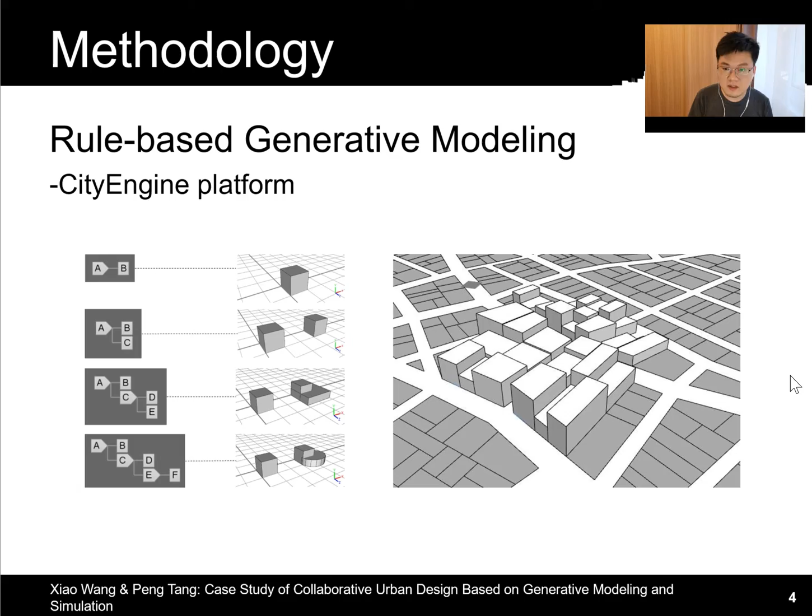So the platform we selected here is CityEngine. It is a rule-based morphological modeling tool. It can generate a city model rapidly by its specific shape grammar language called CGA, short for Computer Generated Architecture. So case number one is district remodeling for local traditional district conservation. In this project, we identify three stakeholders in the collaborative process.

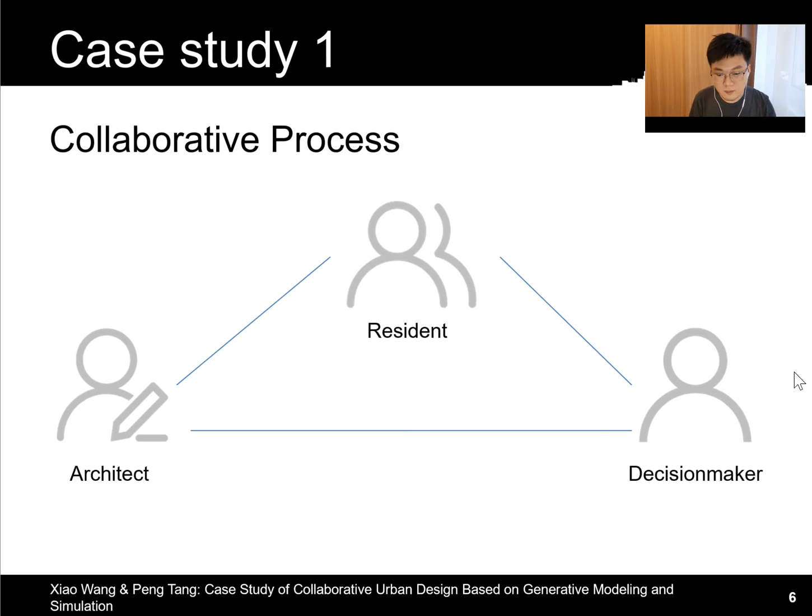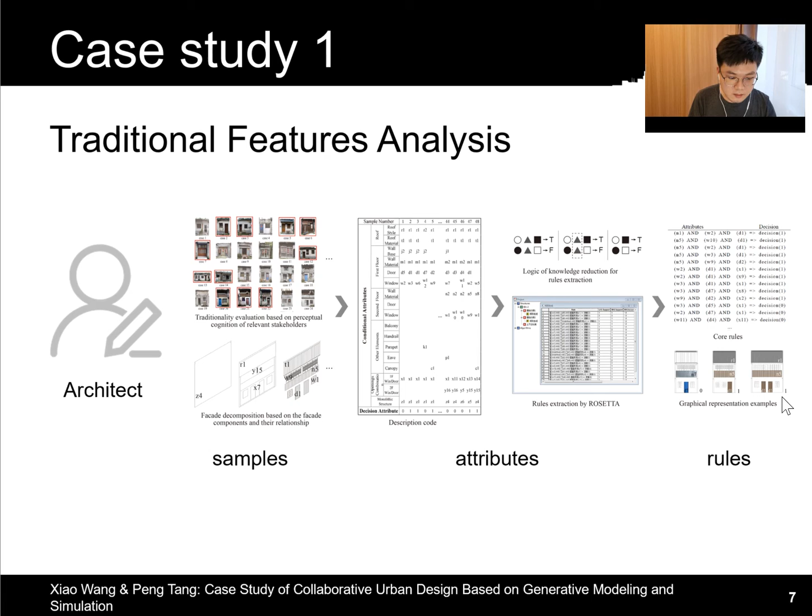Firstly, for architects, the traditional features analysis contains how to obtain, analyze, as well as share information. Based on the research achievement on samples, architects can extract the rules which have influence on the traditional features. It means the rules can control the model generation automatically in the next step.

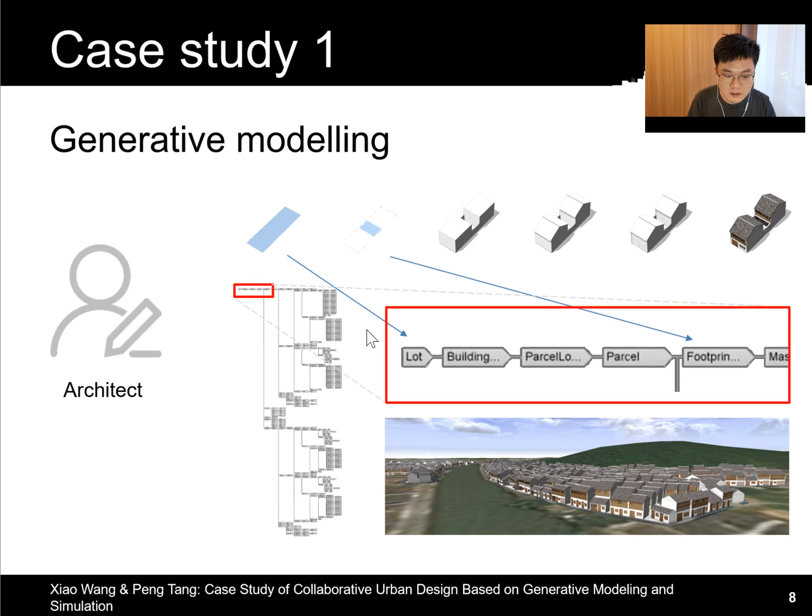According to the logical CGA grammar, the generative modeling can be conducted step by step, as you can see. In CityEngine, if you apply the rule files into a specific lot, you can get the model immediately. From the tree diagram, you can see how the morphological elements grow and their relationships.

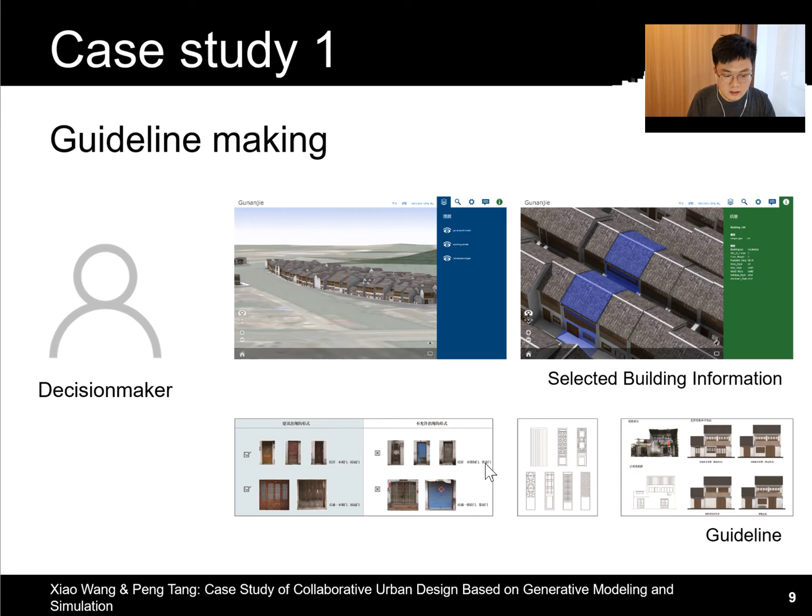For decision makers, the government in this project can get multiple design schemes in both overall and detail views. It is convenient to get the corresponding index such as area, height for further policy making. The generative result can also be printed to establish the conservation guideline for officers and house owners.

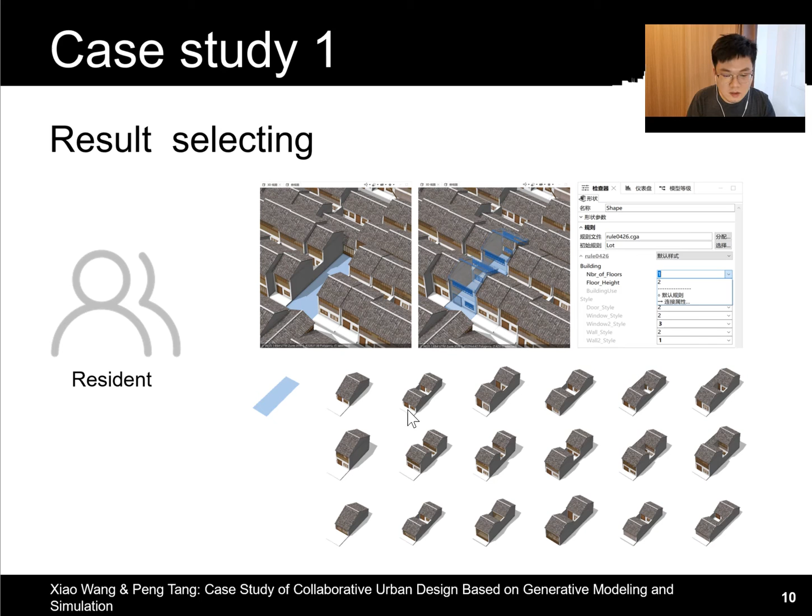And for residents, they can choose a proper scheme according to their own situation. On the same slide, you can see they can get different results as a reference because part of buildings in this district are private. It is unpractical to force all local people to renew their house. So for spontaneous renewal, this kind of menu under the feature control will be helpful to maintain the local traditional characteristics.

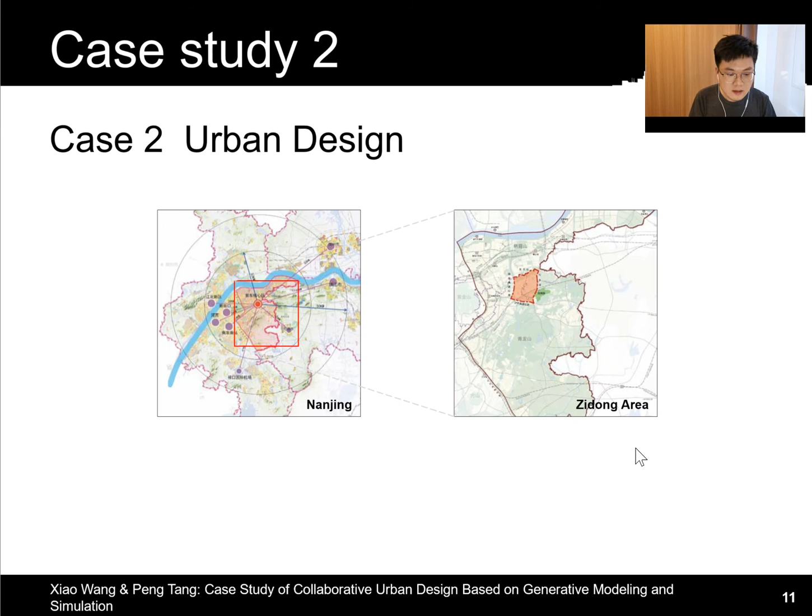Case number two is a modern urban design project in Nanjing Zidong area. This area is planned as a new subcenter of Nanjing, so the aim is very ambitious. It is to make an effort to create ecological priority, innovation-driven, and future-leading urban morphology and environment in this area. So we also identify three stakeholders in this project for collaborative process.

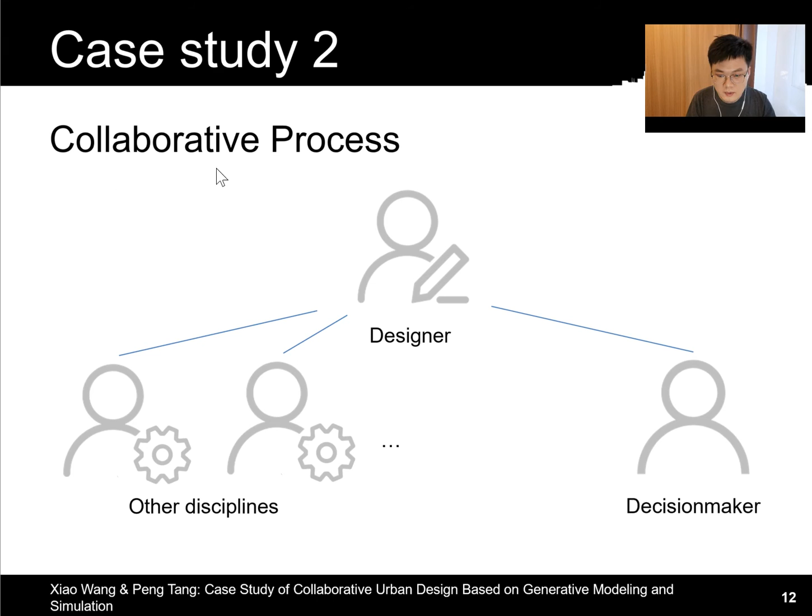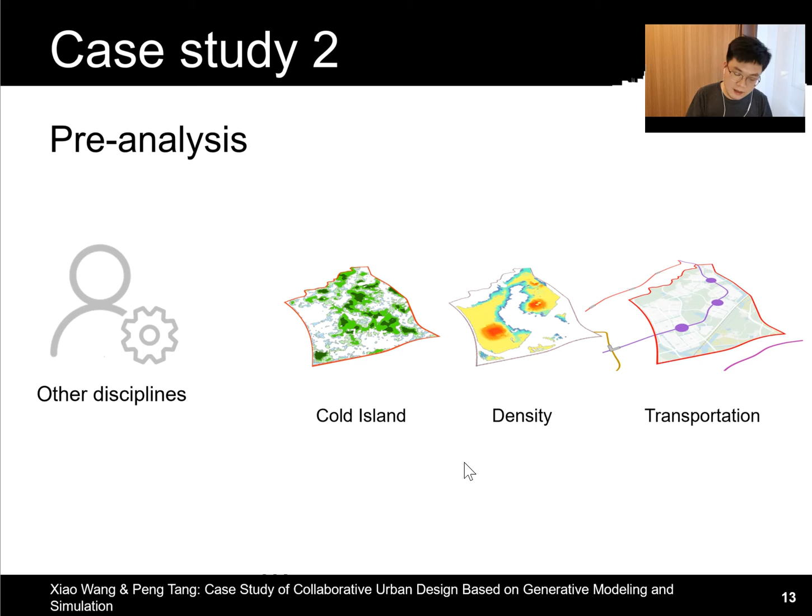Firstly, researchers in related disciplines analyze the main influence factors, for example, the environment, economy, and transportation. The calculated results, as well as the primary construction condition provided by the clients, become the rules of the next generation design stage. Designers can make the initial structure or the space pattern in CityEngine according to the basic data.

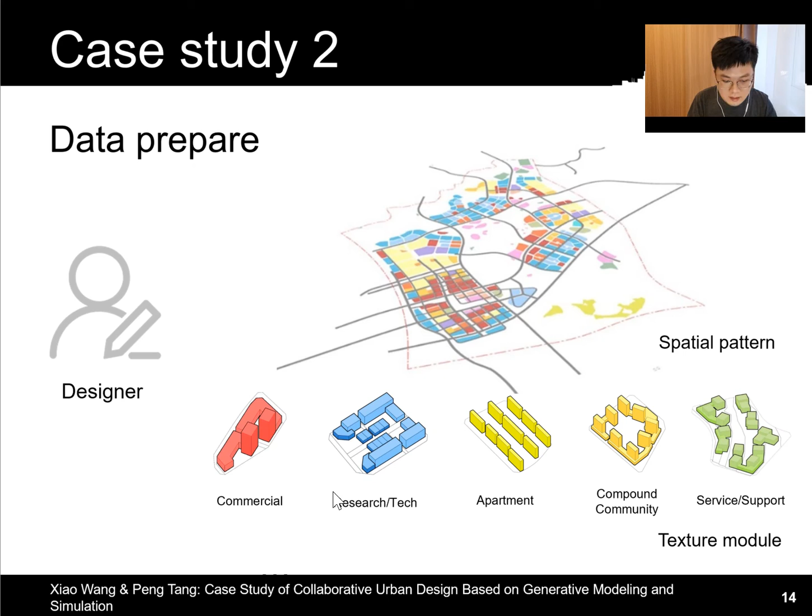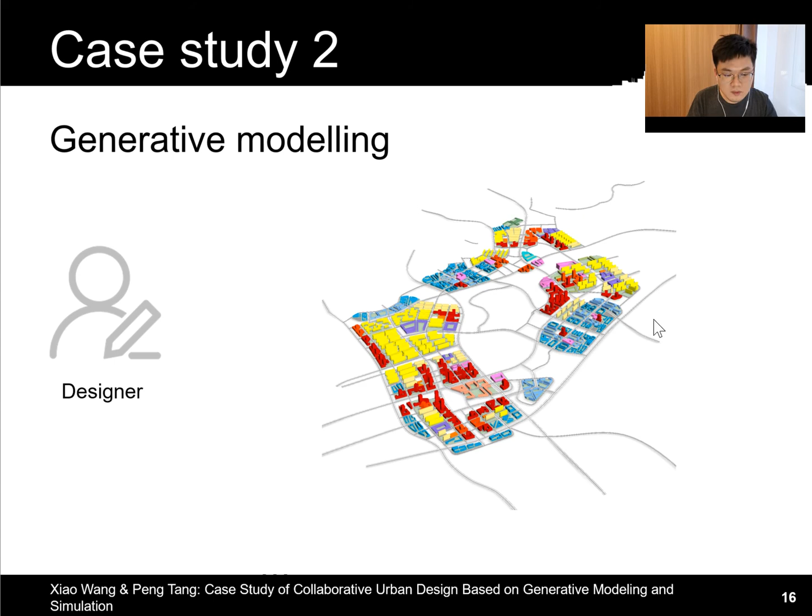For the urban texture, a simplified method is to fill the module on each block. These modules, as you can see on the slide, are summarized according to the design expectation and morphology orientation. For example, the commercial block we wanted has tower buildings, and the apartments look like slab-type buildings. And then each type of module has their own grow rules and corresponding parameters in CityEngine. Then we can get a rough scheme for further discussion and adjustment.

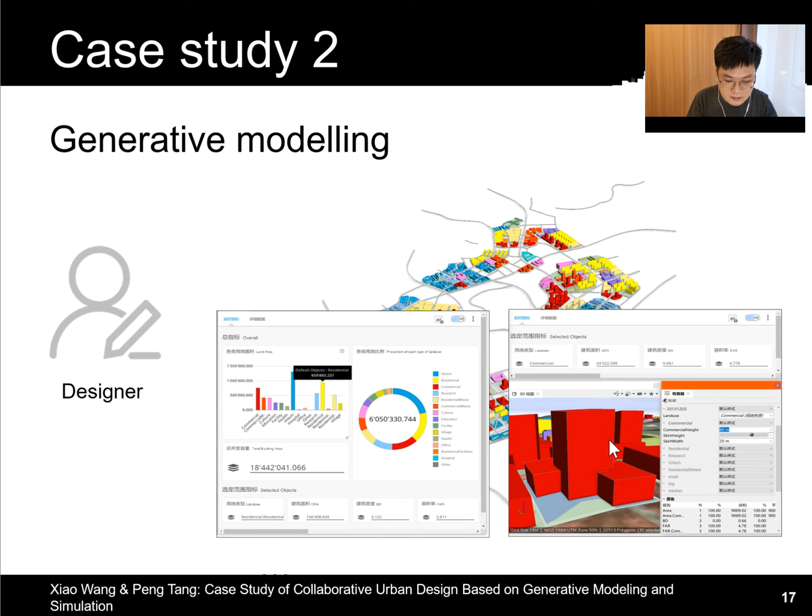If the design conditions changed, you can adjust related factors or initial shapes. Then the whole form and quantities of the urban design can be changed immediately. As you can see, the related indicators in the dashboard, such as area, height, FAR, proportion of each land use, are shown on this. Users can also change the parameters to adjust the detail shapes interactively.

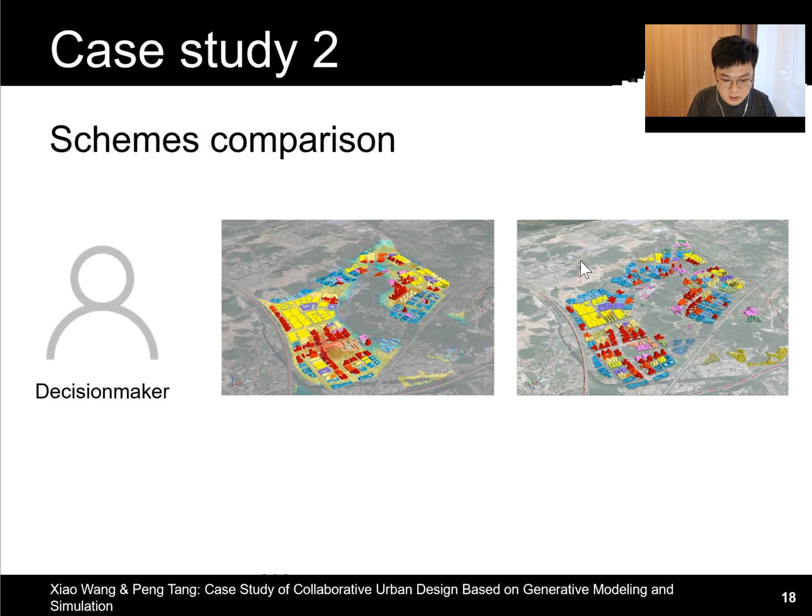For decision makers, in the early design stage, decision makers would like to know not only the space texture, but also the relevant development indicators. It is necessary for the government or for managers to control the direction of the whole design in the real project. So in CityEngine, they can compare different schemes easily. These are two schemes in this project.

Actually, this research is still a demo. In the further development, for example, City Engine is still too professional for ordinary people, I think. We need to find or make a more accessible platform and more powerful interactive functions for users or for governors. We also need to find the proper ways to exchange the data and analyze the results, something like that. So we still have more further research. So it is mainly about my research.